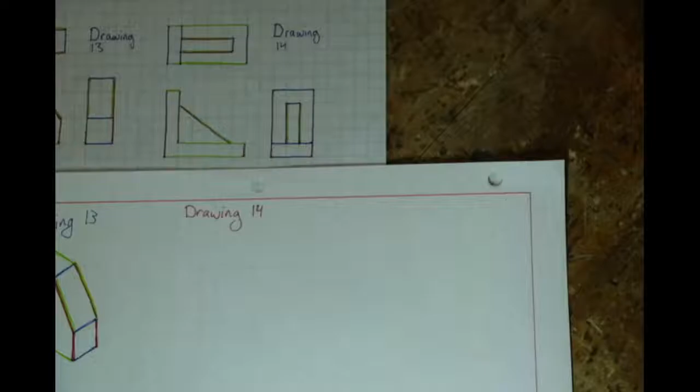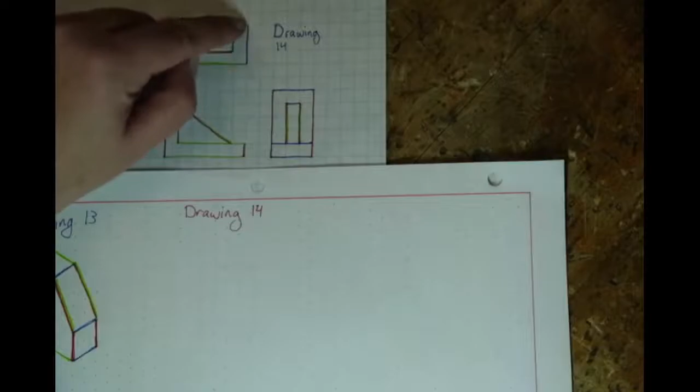Very often what you would see is you would see something like this where there might be some mounting holes, maybe here and here and here and here. You probably have the overall bracket a little bit wider. But just for a sample drawing, you didn't really need any extra material.

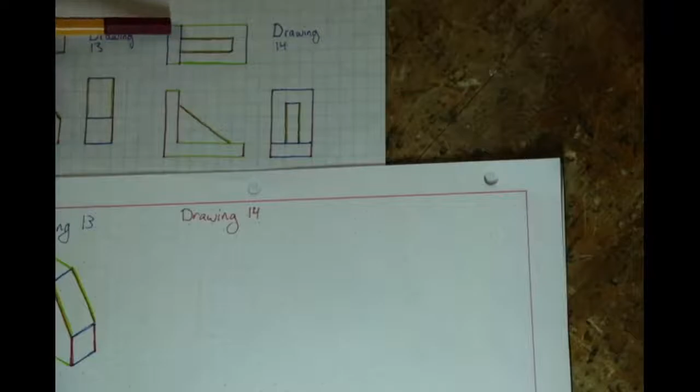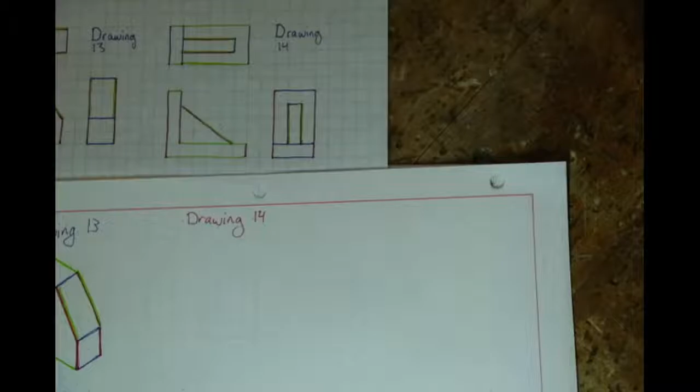So the way I would do this, I would start off by drawing the L shape. So in the front view, you can see L. And then you can see this rectangle here matches up with this. This rectangle here matches up with this. So I'm going to draw that, and then we'll come back for the, what's it called? For the triangle.

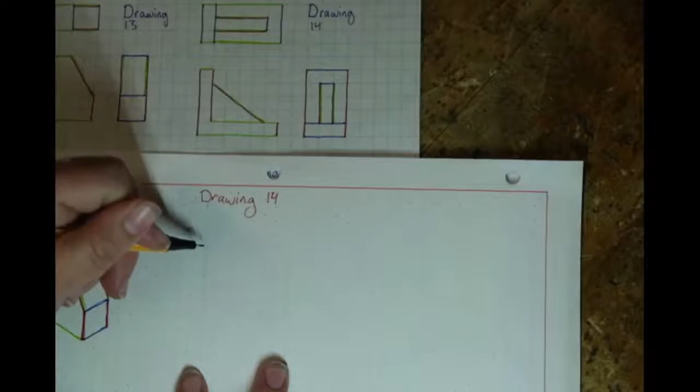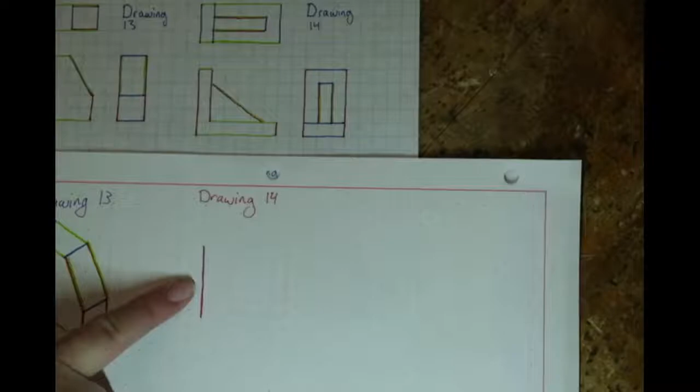So starting here, 1, 2, 3, 4, 5. So in height, 1, 2, 3, 4, 5. So remember that lines in height are always going to be vertical in your isometric drawing. And because this is the front view, we'll only see height and length.

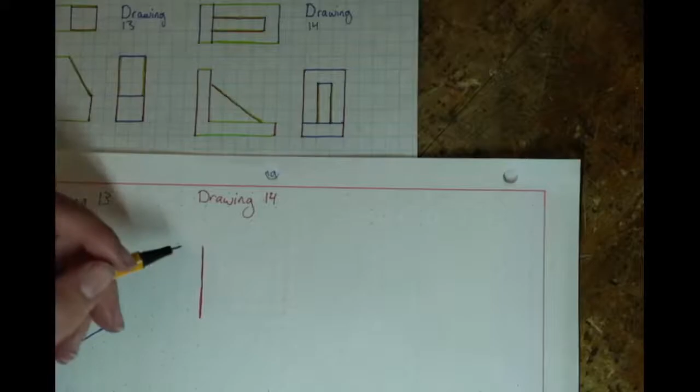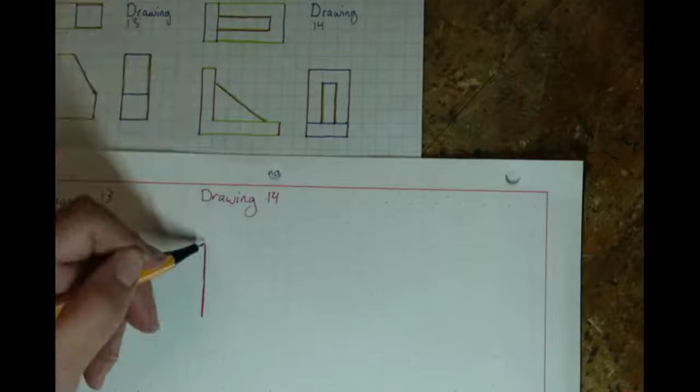Now coming over from here, I can see it goes over 1, goes over 1, 2, 3, 4, 5, 6. And so remember, length is always the right side of a Y. And here I'm starting the back, so I'm going to come to the right. So from here, I go over by 1. Here, 1, 2, 3, 4, 5, 6.

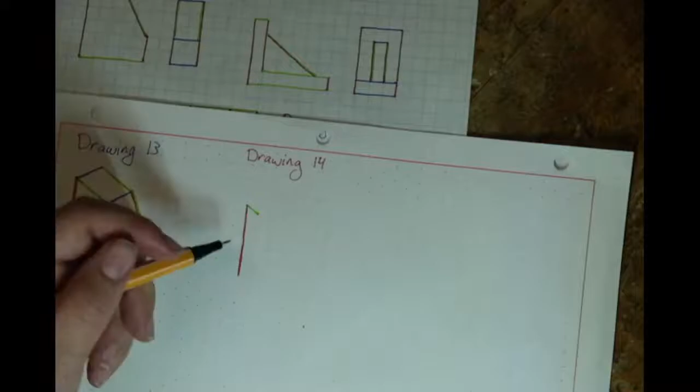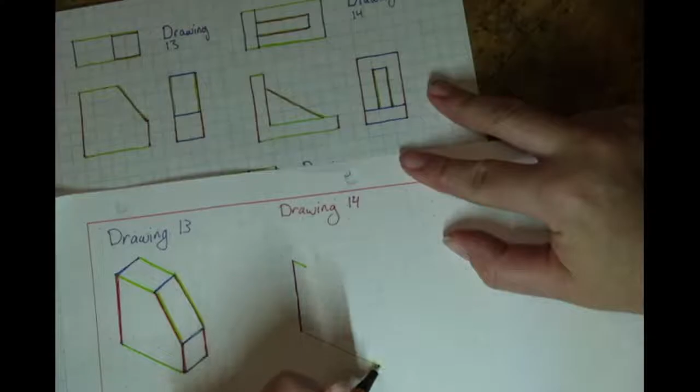And now I'm going to come up. So that goes up by 1.

I'm going to move my light so that my hand doesn't block it as much.

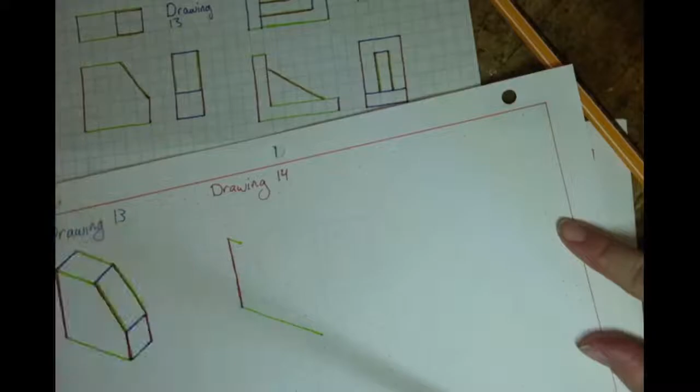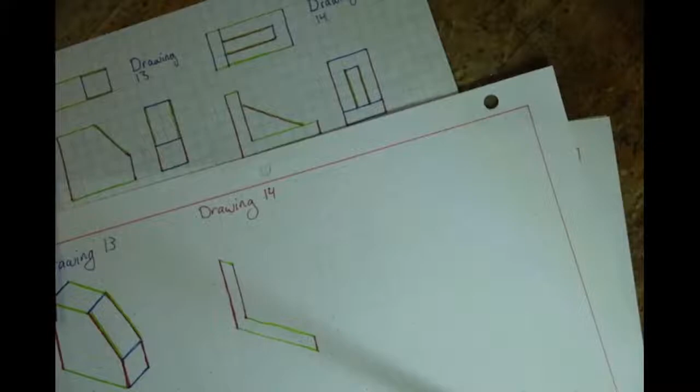So I go up by 1. Now over here, I come down by 1, 2, 3, 4. So I come down. Now I'm going to connect. And so that's going to give me the front view of that L shape. And that L shape is going to define the rest of this shape that we're drawing.

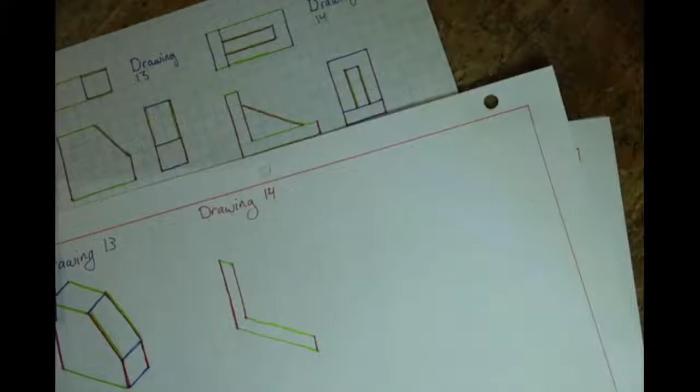I am going to draw part of it in pencil just because I want to make sure that I'm able to erase what I don't need. For you, that's not going to be such an issue because you're probably already drawing in pencil. If you aren't, I would certainly recommend it, especially for this particular drawing. So now to draw the rest of the L, I will still draw most of this in pen. I have a pretty good feel for where I can put the lines and where I can't.

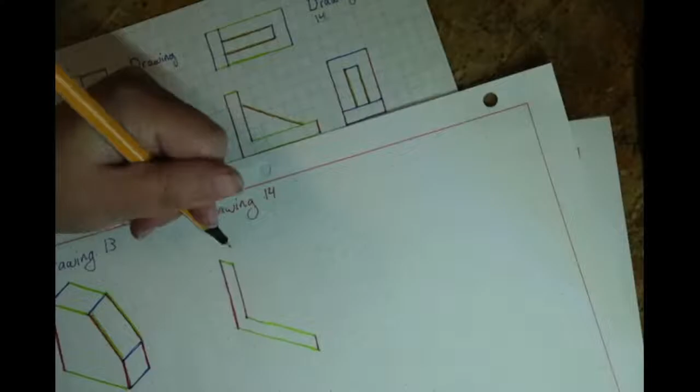So I'm going to draw the depth. So I can see that coming back from here, it's 3 units. So you can see the way it lines up. So remember, depth is going to be the right side of a Y. Same thing here. So 3 units.

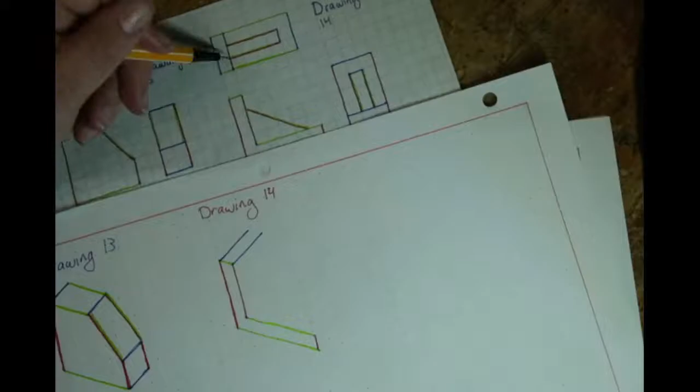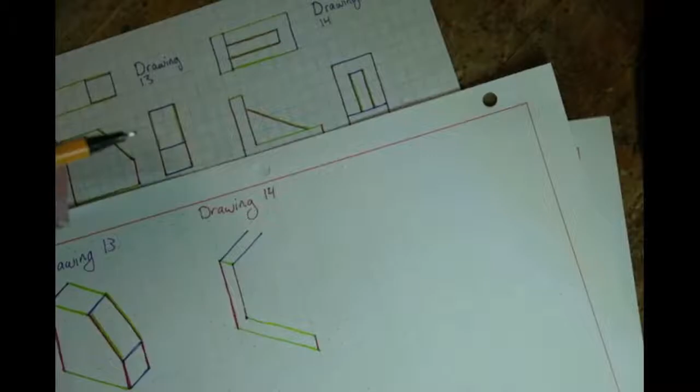And now what will happen is, coming back from this corner, I also have some form of depth. So I'm going to come back. I'm not going to go all the way through. Now, I actually know how far it's going to go, but I'm going to put this as a pencil line for now. And we'll come back to that in a moment.

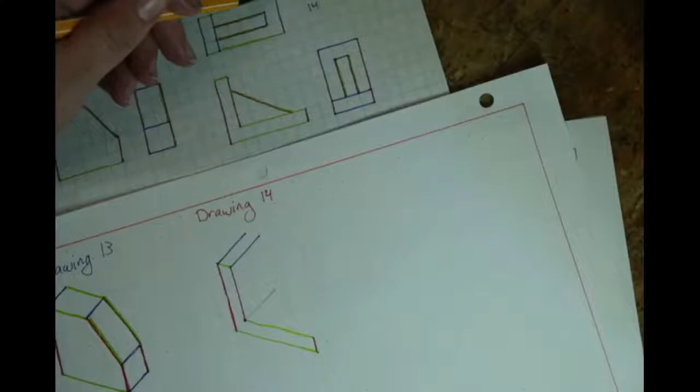Now coming back from here, we can see it lines up right here. 1, 2, 3. And here, we can see it right there. So this gives us our L shape. I'm going to fill in what I can. So I don't have anything getting in the way here. I don't have anything getting in the way here.

Now, just to show you where this is headed, we are going to end up having a line coming down from here. We're going to have a line coming over from here. We're just not going to draw it quite yet.

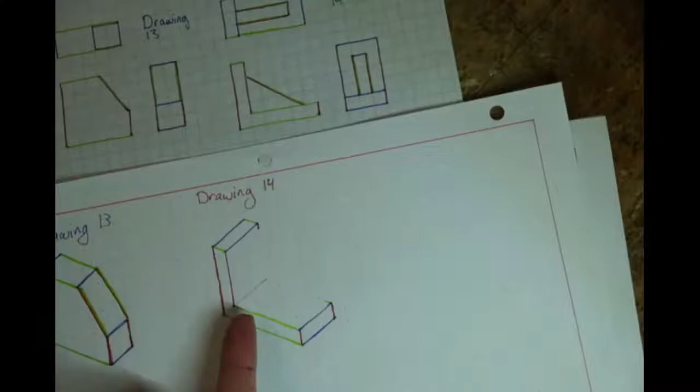So that's our L shape. But to finish the drawing, we have to deal with this shape in here. In the front view, you can see a triangle. And if you think about a triangle, it makes sense that here it's going to be a rectangle. So I'm going to just grab a shape to use as my example.

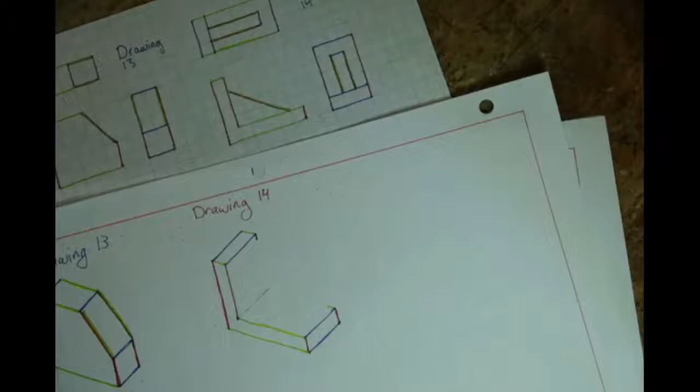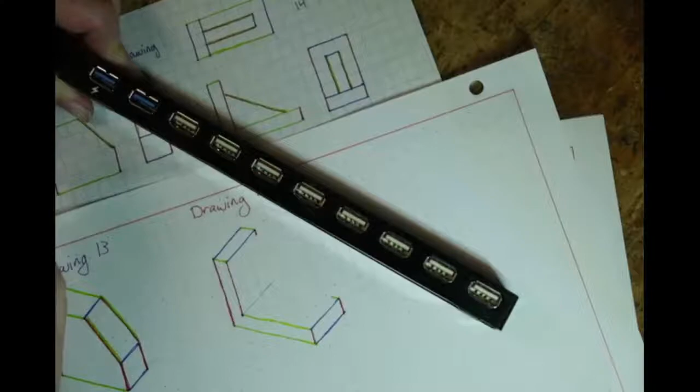So if I grab my USB hub, let's say that when you're looking at it from the side, we have a triangle made up with this as our long side. And then it comes over like this and this. So what we have now is a right triangle with this as a hypotenuse. Now what will happen is when we look at it from above, it just looks like a rectangle.

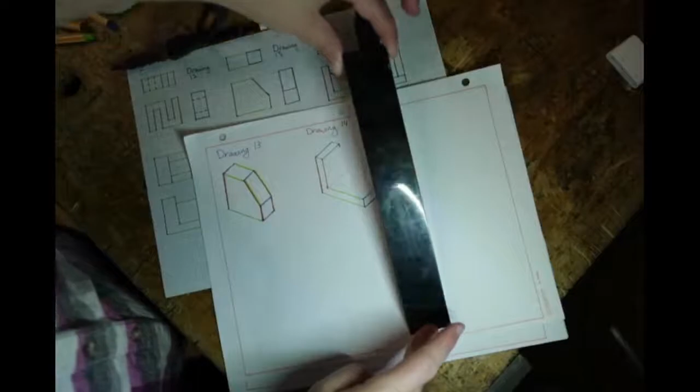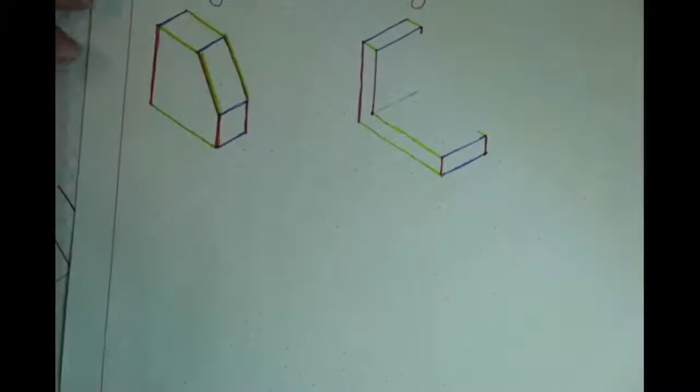But the thing to be aware of is as I angle it up, it appears to get shorter and shorter if we're looking at it perfectly from above. And so that's what's called... And that's an important thing to keep in mind because if we take a look at the orthographic drawing, whether it's the multi-view drawing, the flat one,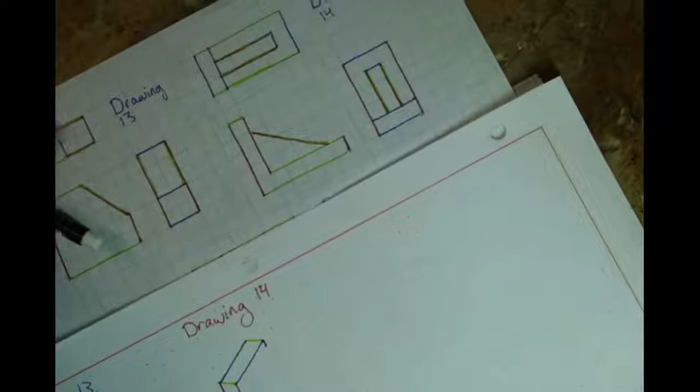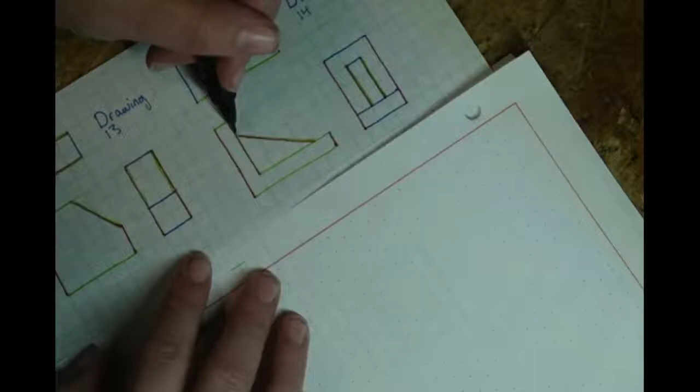right here I can see the actual length of that line. This line here is actually shorter than this line. This doesn't show the correct length of it. Only this line shows the actual length. But we don't really need the length to be able to draw it. So if we take a look, we can see that from above, this looks like a rectangle. And it's centered from front to back,

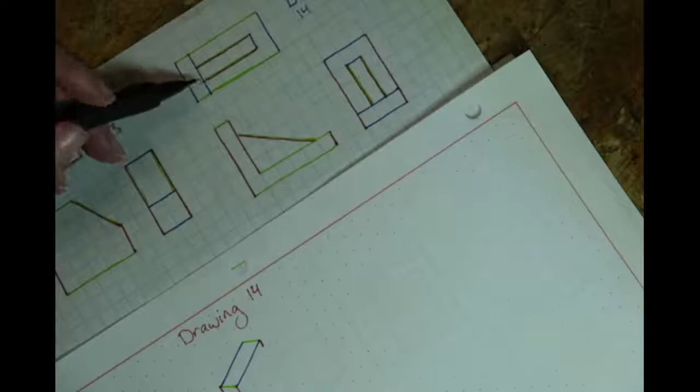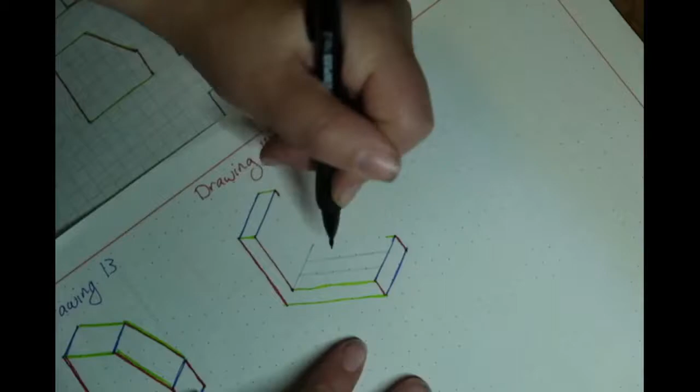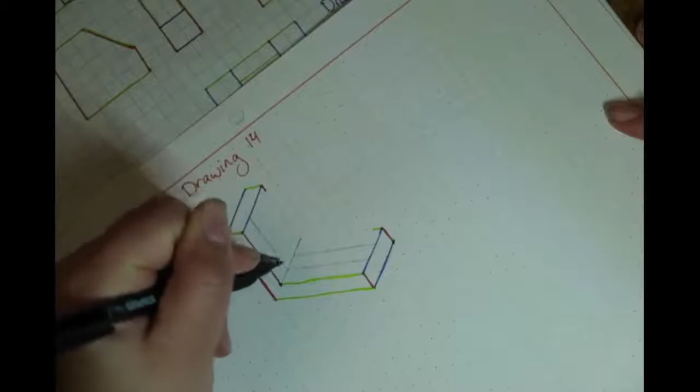which means that if we were drawing this, I'm going to show you basically how we could work this out completely from scratch, and then we're going to go through and do it the better way. So I can see that the bottom would be right over here. And coming up here, it would be like this. I want to make it really clear: this is not the actual length. It's not the actual size. It's just showing the placement from front to back.

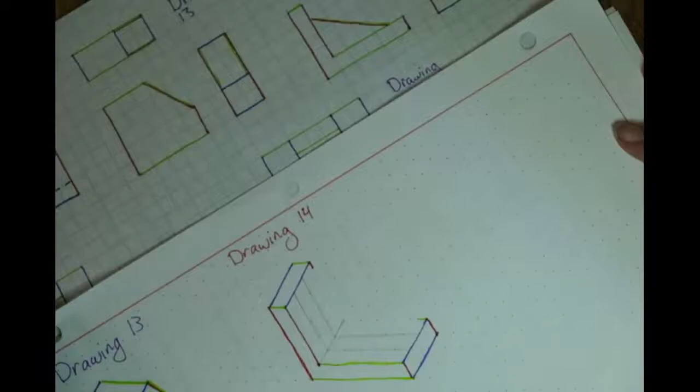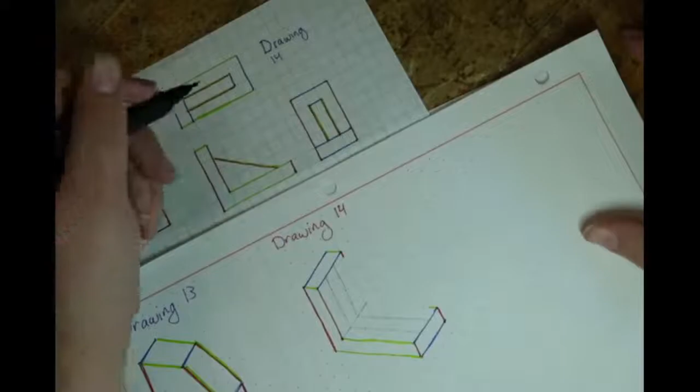Now, if you take a look at the top view, you can see that going left to right, it stops right here. So 1 unit over from the side. So it stops right there. In the side view, we can see it stops 1 unit from the top. And so that gives us our endpoint.

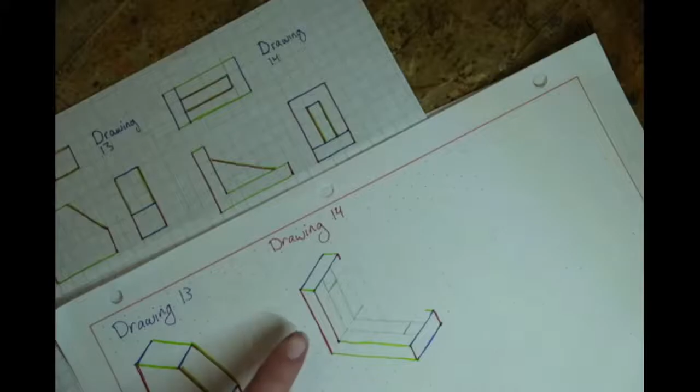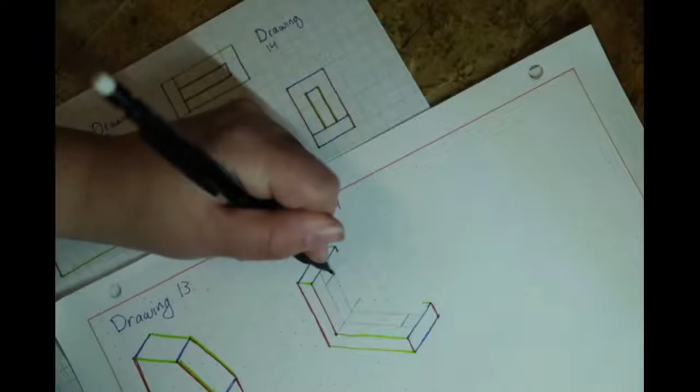So I drew some extra lines that I wasn't going to really need, but that's okay. As you get better at this, you'll be able to look at that and spot where those lines go. For now, though, you're going to need to keep this line because it's going to be visible, and this line is going to be visible, and these two lines. And let's take a look at what they match up to. For now, let's take a look at these lines.

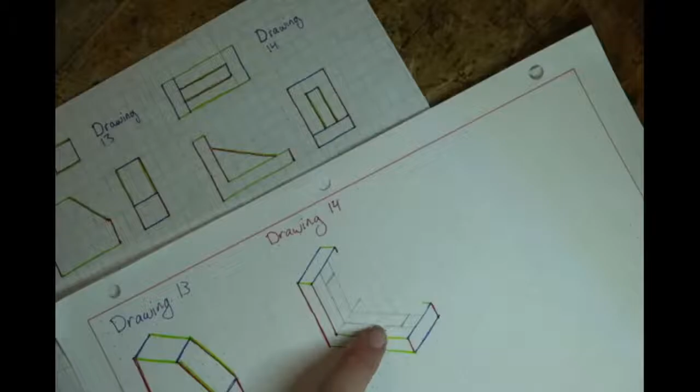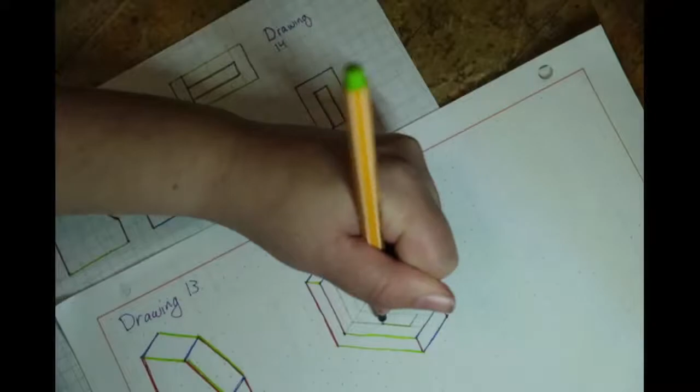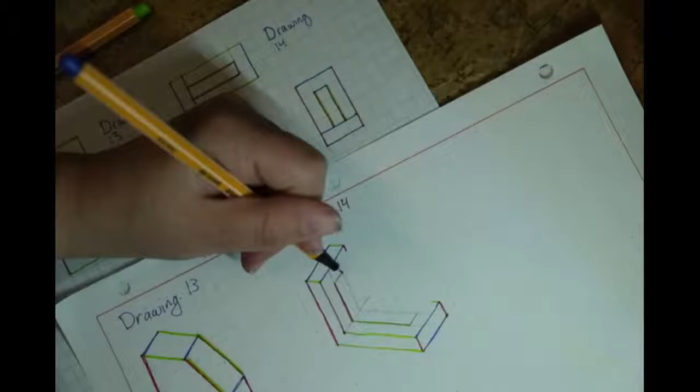This line right here, that's a line that shows length. So I'm going to color that in green. This line right here is going to show height. So I'm going to color that in red. Now, this line right here is showing depth. It goes from front to back. Even if it's not all the way through, same thing here. So I'm making those blue. And now I'm actually going to delete some of this that I don't want anymore.

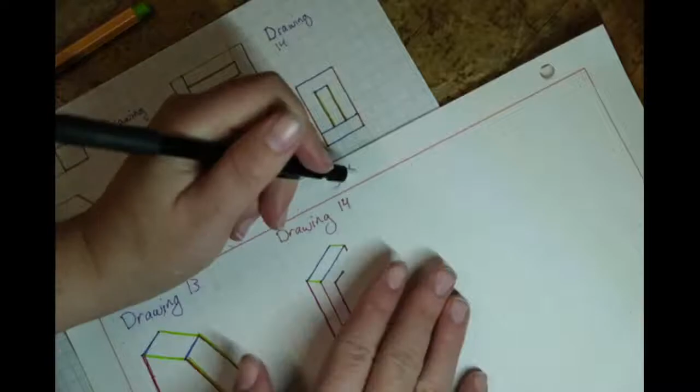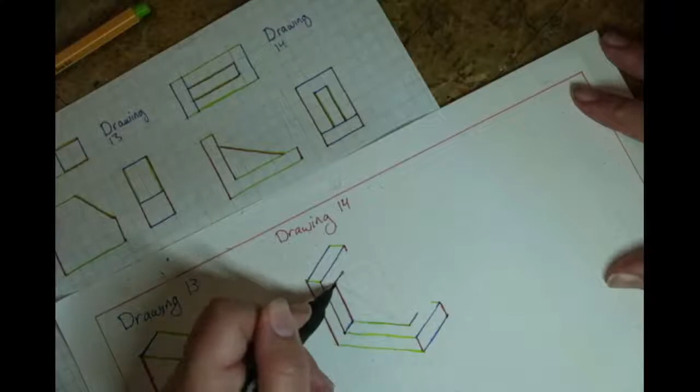So I am going to put this line back in, this time in blue. And now to actually connect them, I strongly recommend that, even if you're freehanding along the lines, for the angles you really should use a straight edge. Don't be like me. I can get away with doing this freehand because I've been freehanding drawings like this for a really long time. But don't try to freehand. It's kind of a pain to do.

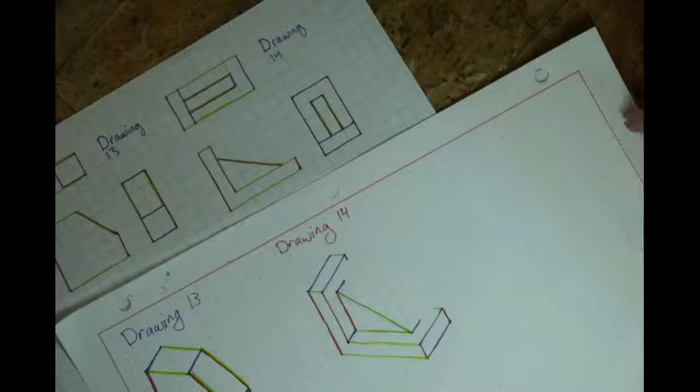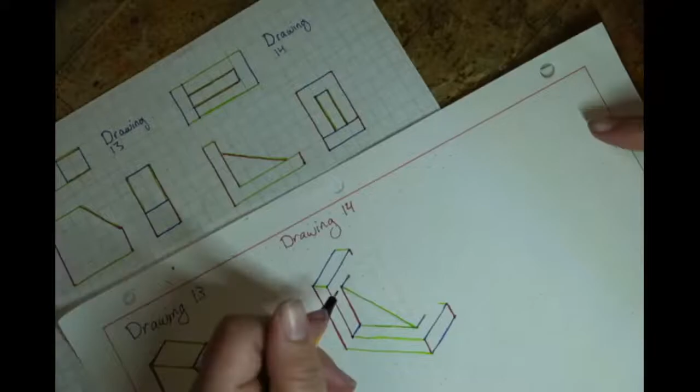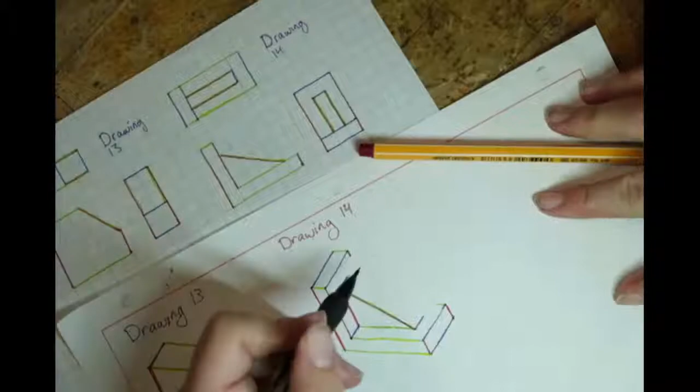But there you go. So it changes in length, but it also changes in height. So I am making it both green and red. We do the same thing over here. So red for height and green for length.